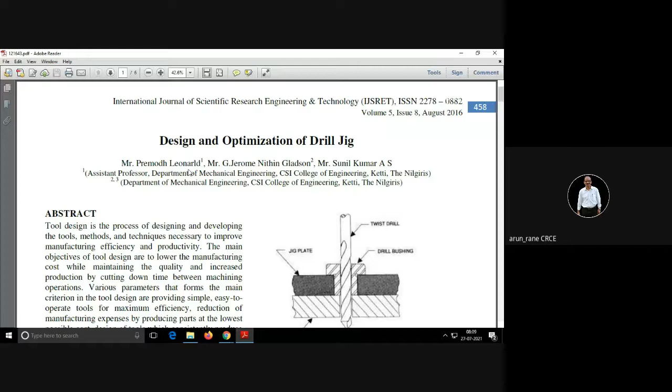So I showed you in one paper how the model looks like. So this is how you have to make it in SolidWorks or NX or Fusion, whichever software you have and whichever software you are familiar with, right? Analysis, if you can, you do it. Otherwise, you forget it. It is not in the syllabus.

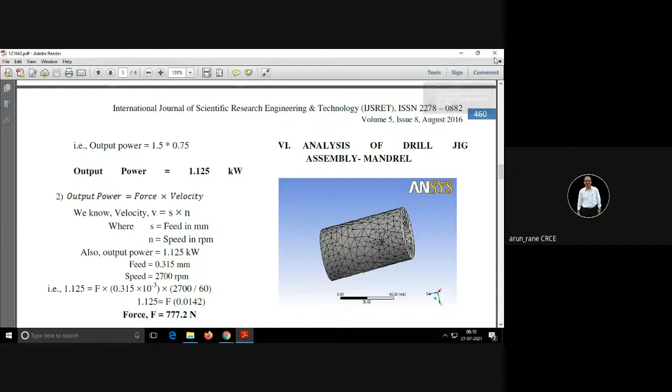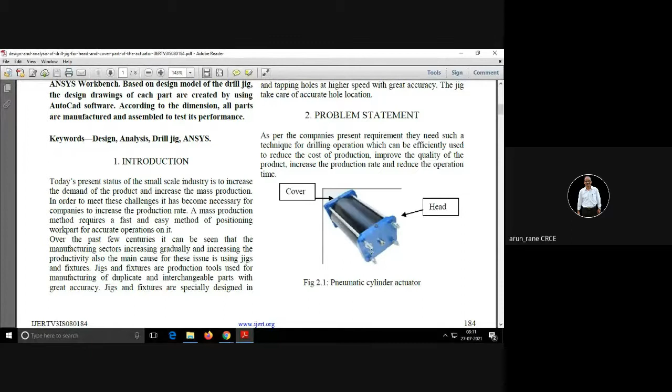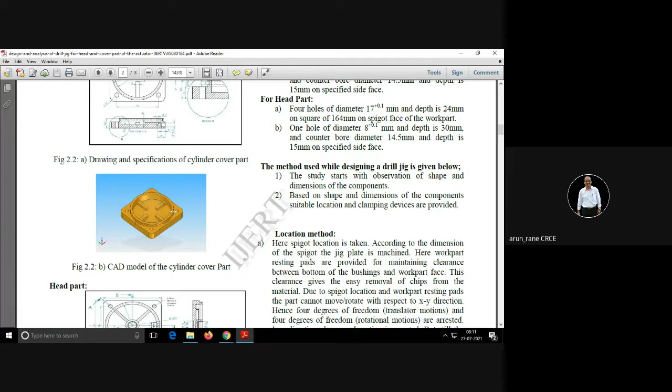So there are two ports, inlet port and outlet port, and it is reciprocating type. These are called tie rods, which fix the two covers. So these are the four holes through which the tie rod will pass, and from one end we are fixing the nut. Here the location was taken. This is called the spigot. This spigot diameter, that is the outside diameter, was taken as a location for designing the jig.

You can see this spigot location. Okay, so you can see the shoulder here and this inside diameter. So your workpiece will rest on this face and on this ID. Your spigot outside diameter will correspond to this ID and will rest on this base. Then you have two strap clamps to hold the component firmly, and your part can rest along these pads. So these are the resting pads, right? And these are just the support pads.

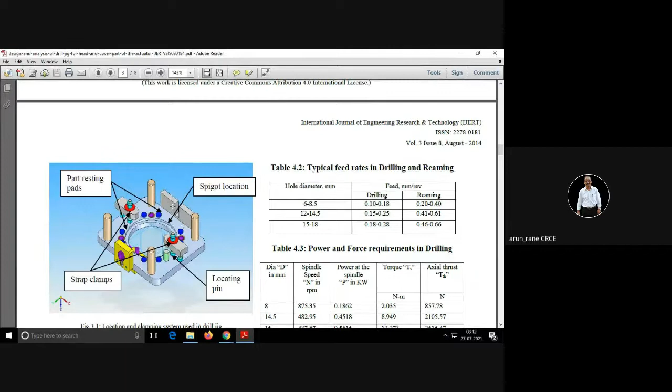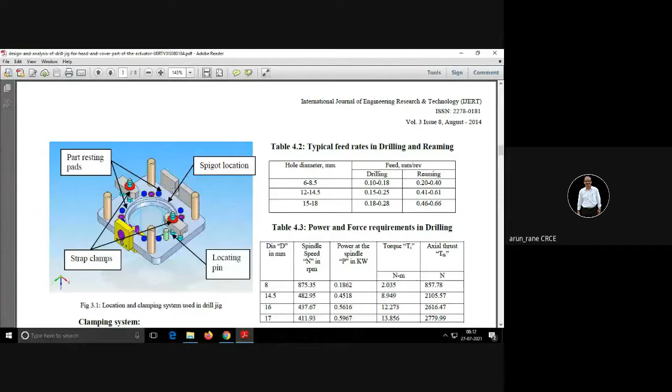Now if you look at the geometry, there are chances that this will rotate, because your location is the spigot outside diameter. So when the operator is clamping in the drill jig, there are chances that it will rotate. So in order to avoid that rotation, you have to butt one square face, either this or this, against these locating pins, so that your holes will come exactly at 45 degrees.

Imagine if you don't orient this part properly, then this hole may or may not come at this angle. It may come here, it may come here, anywhere. So that's why in this component there are two locations. One is this spigot OD and another is this face.

बराबर है? So यहाँ पे what is the qualifying operation? Can anybody tell me in this particular component qualifying operation क्या है? Renan Fernandez, are you understanding? Are you there, Renan? Yes, sir. So can you tell me in this particular component, what will be the qualifying operations?

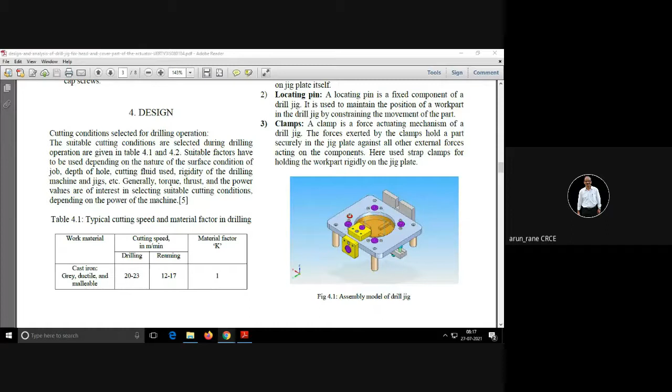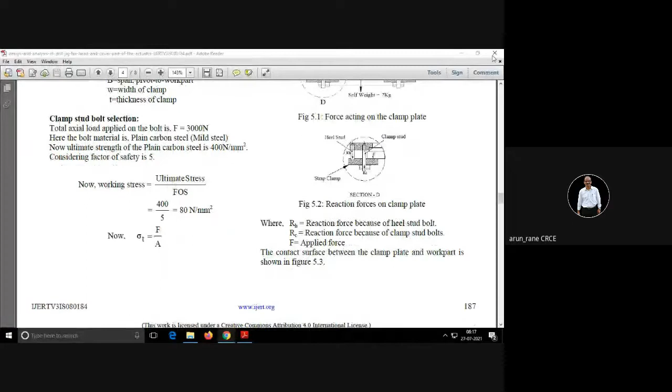So this is a second paper and you can take the reference of this paper also before you start your drill jig design. Let us see in this paper. So you have one design here, you have second design here, plus you have one more design which you have done in third semester. One simple component.

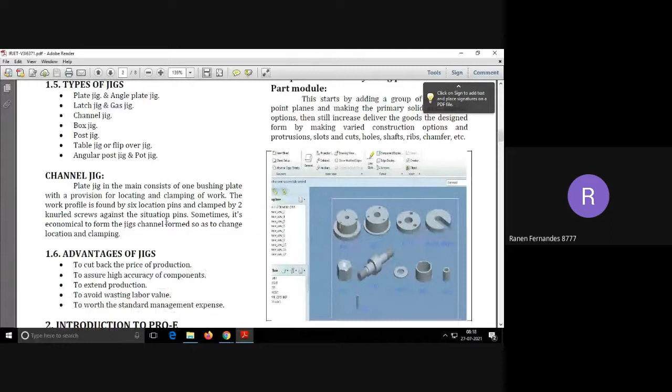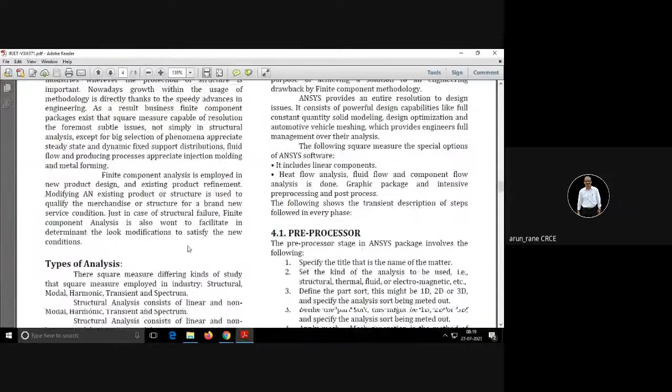The bushes, jig bushes, that is this bush that passes through these holes, और ये bush के अंदर से drill जाता है. Okay, this is the washer for clamping. Now Ranen, can you tell me what for these slots are? There are 3 slots given here. So what is the purpose of these 3 slots? आपने मॉडलिंग में किया था 3 slots, circular slot. So to lock the motion, rotational motion.

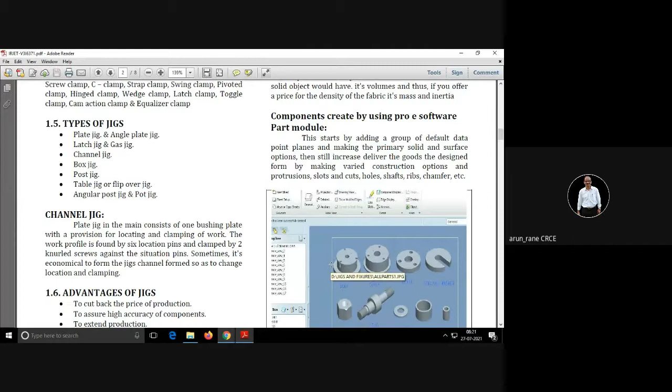रिमूव्ड वेरी इजीली, दैट इज द पर्पस ऑफ दिस स्वार्फ। So this component has been done in third semester.

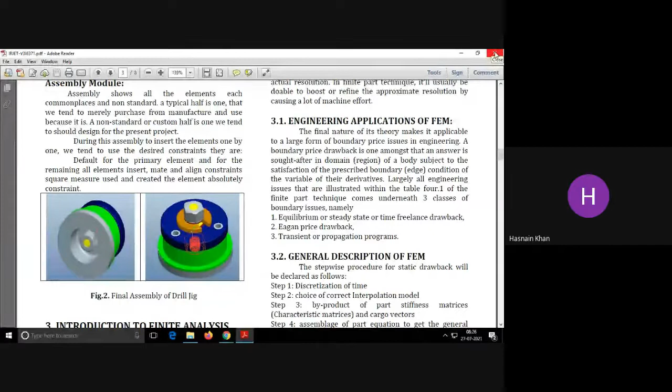Yes, sir. Okay, let's go for construction of the drill jig. Then I will also show you some component like this, SolidWorks file, like what are the different types of jigs. So this is called the angle plate jig. So this is an angle plate.

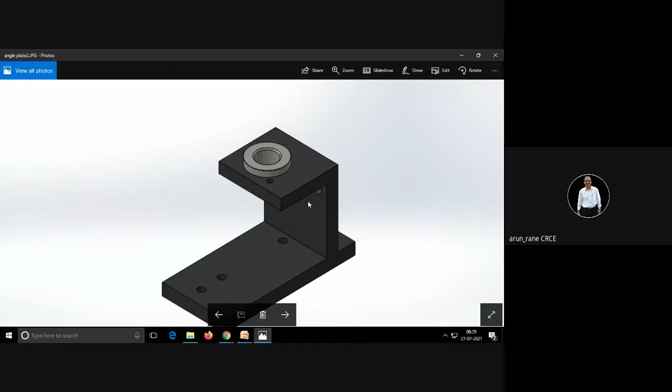Damage. Maybe within 10 or 15 jobs you will have to replace the bush. So that's why you have to go for a hardened bush always. And then here you have to keep a locator which will locate the component. See, now this is a component. Okay, this is one support, this is a pin for locating. And through this the drilling is going to be done.

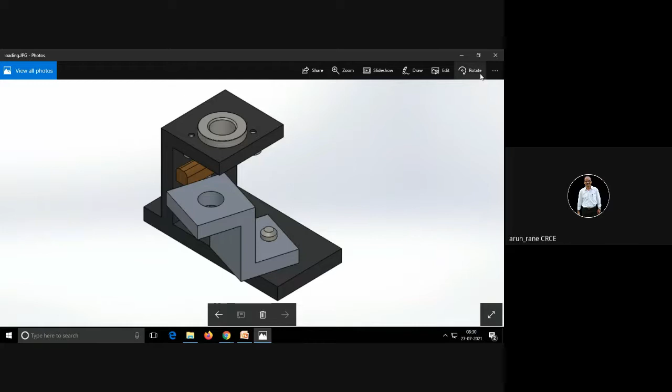At the same time, this works as an orientation also. You can also give the orientation here. आप यहाँ पे भी ऐसा एक पीस डाल सकते हैं, यहाँ पे एक सपोर्ट, so that ये जो फेस है that will butt against this face. So you have to see for the location, you have to see for the orientation.

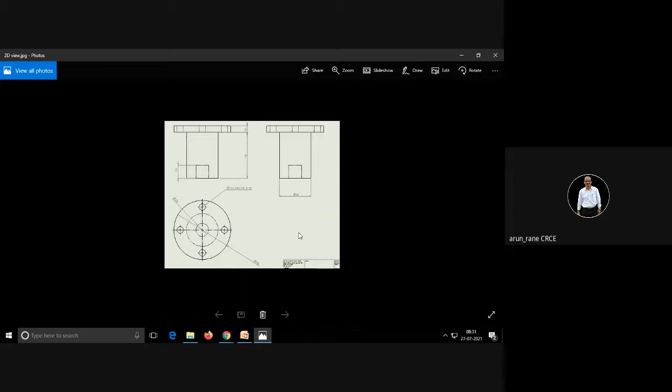These are all SolidWorks files, but since this particular computer doesn't have SolidWorks, the files will not open. This particular jig is called the pot type jig. There are different types of jigs: angle plate jig, box jig, channel jig, turnover jig, tumbler jig. So this was your pot. It looks like a pot.

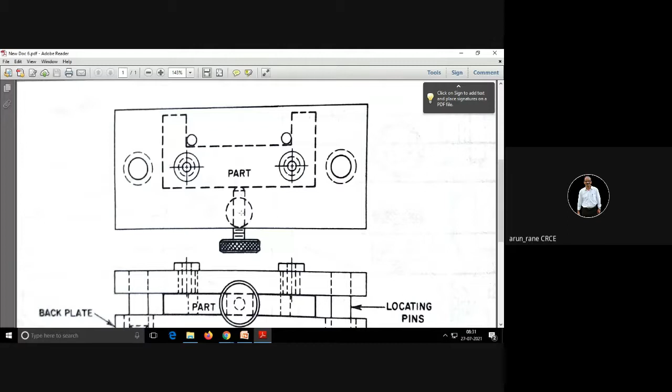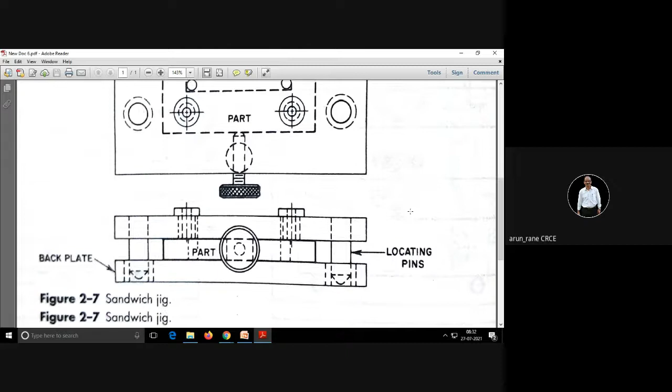So this part is sandwiched between 2 plates. That's why this is called a sandwich jig. We have one bottom plate and another top plate. 2 plates के बीच में the component is fixed, and that's why it is called the sandwich jig. These locating pins are not for the component, but for the assembly of the jig, to assemble these 2 plates. So that was your sandwich jig.

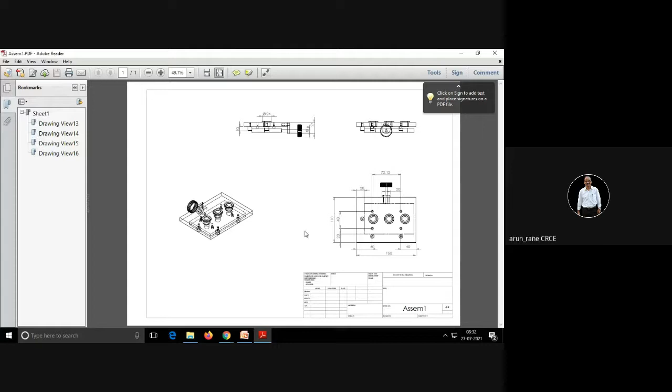Again here, these are the jig bushes for guiding the drills. This is for the template jig. So you are using a template to guide the drill here. Here you are using a template.

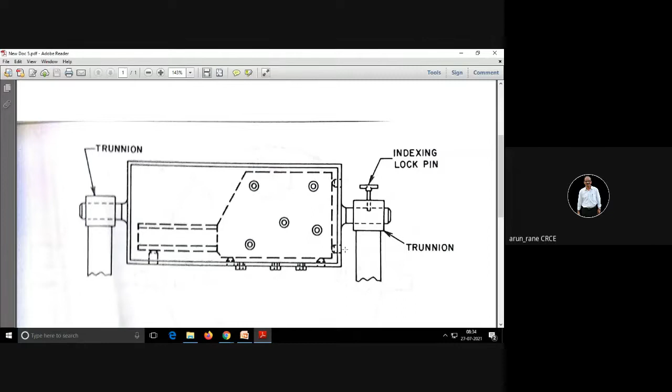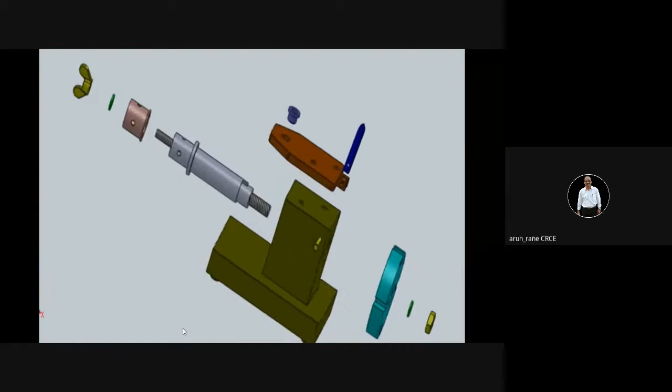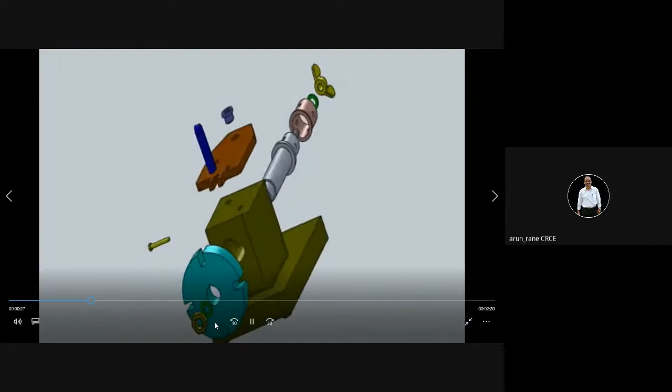This is a turnover jig. Turnover jig is nothing but you have to just turn it, make it upside down, and that's why the name turnover jig. So this is an example of indexing jig assembly. This is called the exploded view. इसको हम लोग exploded view बोलते हैं, जिसमें कि all the components along with their directions are shown. It also gives you an idea how to assemble the jig.

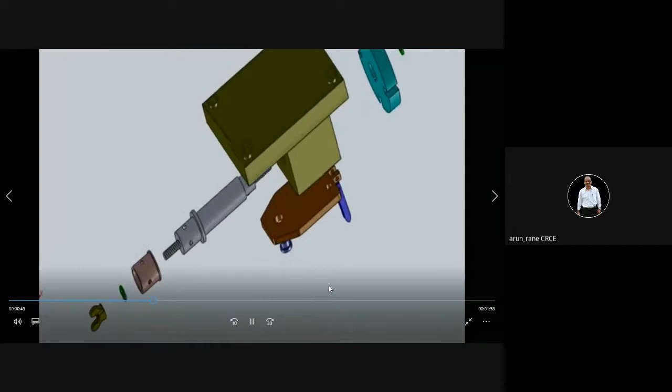Like now these are the pins, guide pin that is to be inserted from here. Then this is your indexing plate जिसको कि राइट साइड से डालना है. देन टॉप से आपको ये टॉप प्लेट लगाना है, and you have to take this base plate as a reference on which you are doing the entire assembly.

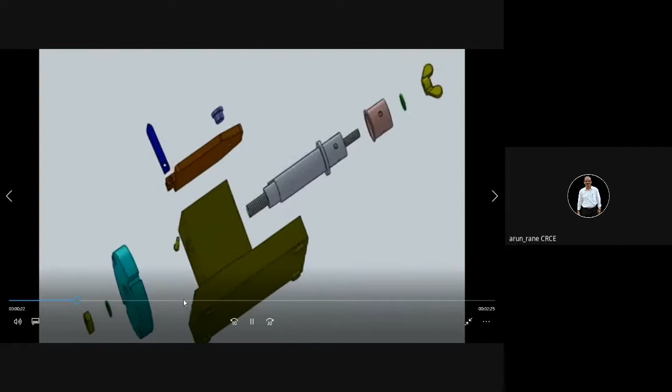This is called the wing nut, and this is our ordinary nut or standard nut. This is the index plate, this is the lock, this is the bush. So if you want 6 holes, then you need to have 6 slots here at 60 degrees. If you want 8 holes, then you need to have 8 slots.

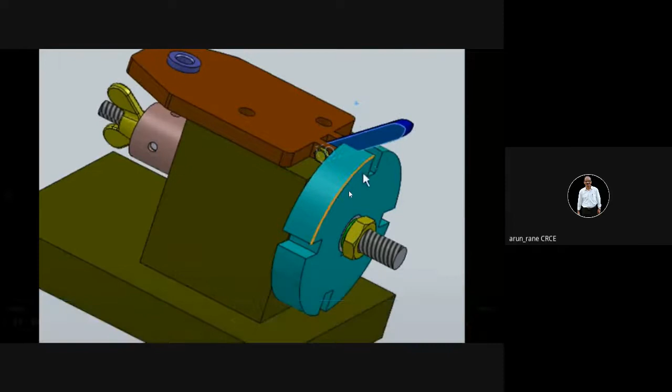In case of milling, an indexing head also can be used. A milling indexing head also can be used. So in case of milling, that is for the dividing head, there are a number of holes, and you have pins, index pins. So you have to just use those number of holes which are drilled on the index plate with the help of an index pin.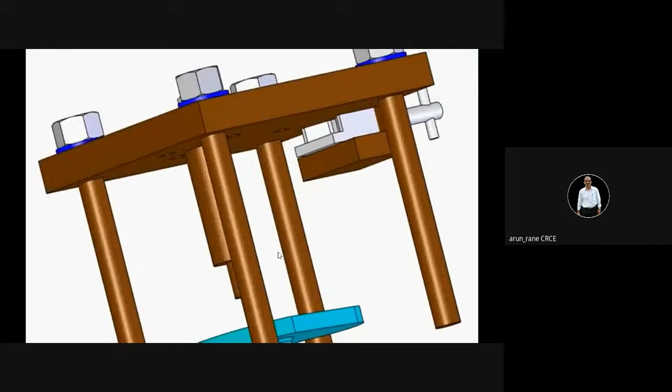Or at the time of drilling, again you have to turn it upside down. So that's why it is called the turnover jig. This is your locator. Okay.

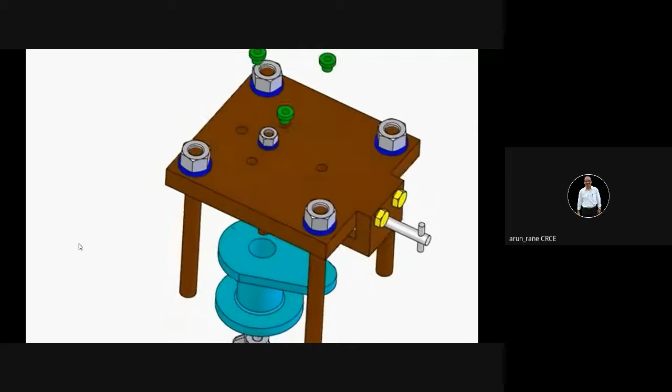Before you do modeling, you have to draw a rough sketch of the assembly with the dimensions. Don't try to directly make a model in NX or SolidWorks. First have a rough sketch with dimensions. This is your jig bush.

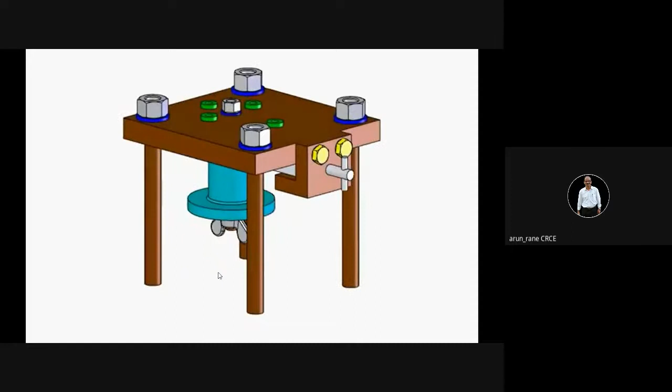Now, all of you must have understood that it's very difficult to place the component from below. Okay, so first you have to turn it upside down so that this particular jig will rest on this face. Now the component can be unloaded and loaded easily. Tighten that component, again turn it upside down. Okay, and drilling can be done. So this is what is called the turnover jig.

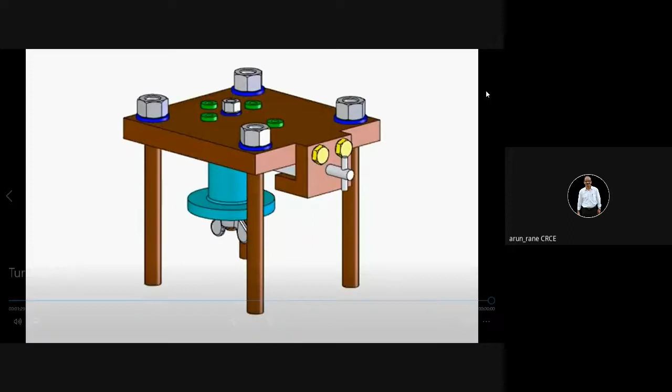So this also can be a good reference for you. So this is the fifth design, the turnover jig. Indexing jig was

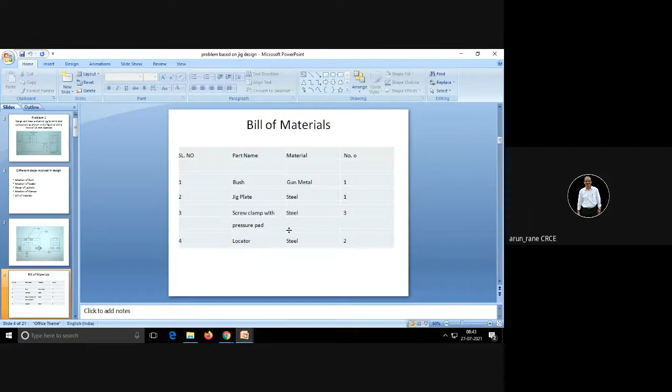Here there are some problems. Design and draw a channel jig. This is another. So you need to prepare the bill of material also. Problem 2. So we'll have to make 3 sheets. One is your drill jig, another is the milling fixture, and next is the progressive die.

So turning fixture, I was just checking yesterday, is not there in the syllabus. So you don't have to do the turning fixture. Only you have to do the drilling jig, the milling fixture and the progressive die.

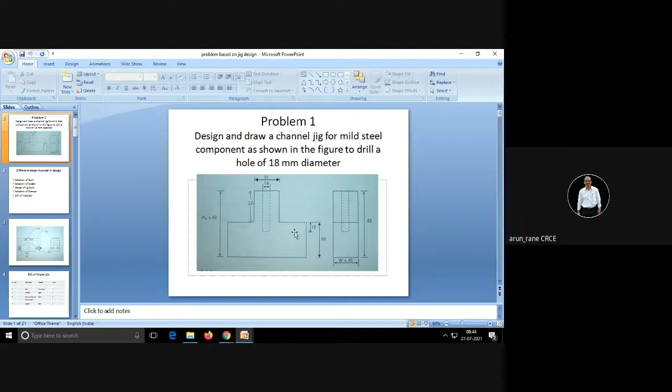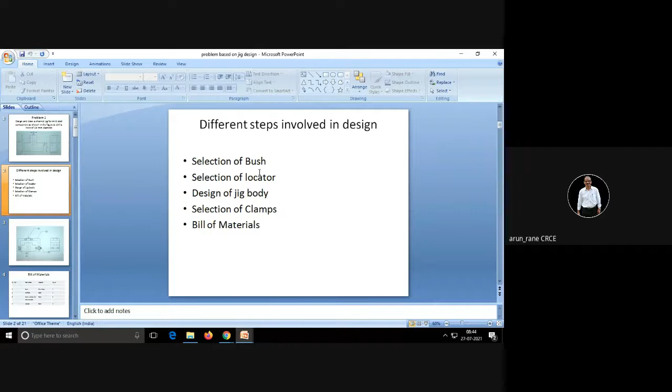The drill size is 18 dia and the depth is approximately 22 and 15, so it will be 37. So what are the different steps? You have to select the locator, references, bush, then you have to design the jig body, clamps, and then the bill of material.

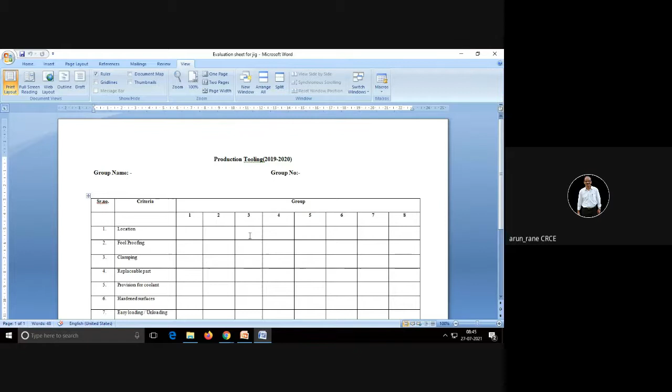This is something called the evaluation sheet for the jig, which also you can use, or a checklist. Generally, for assessment purposes, we prepare this. Like say here group numbers are given, okay, and group number one.

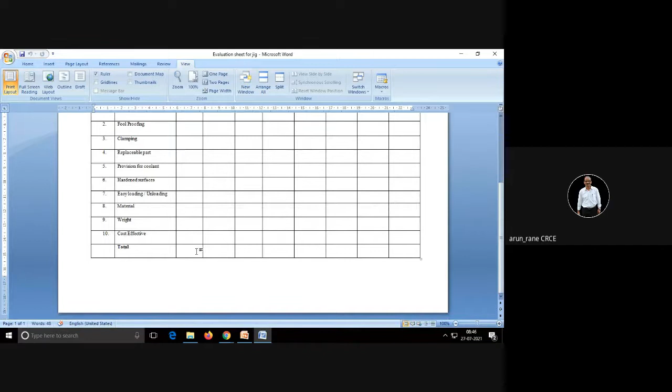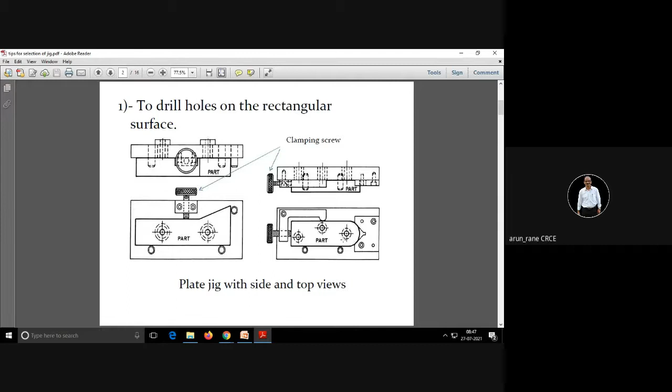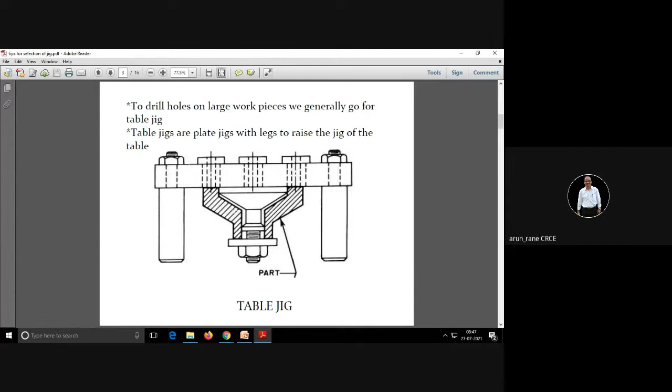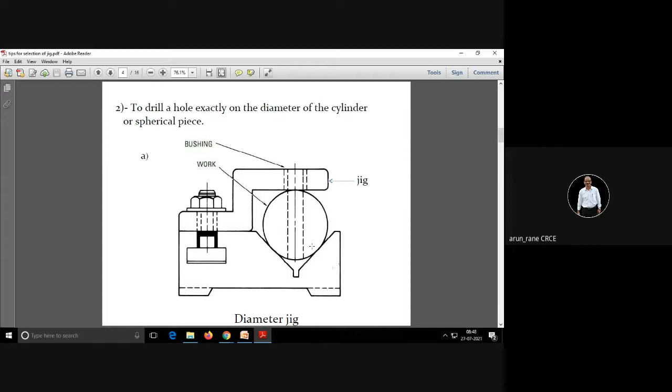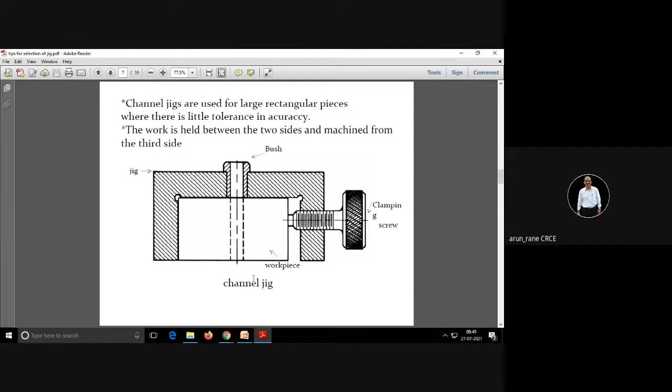So if you consider perpendicular to this screen, there are no locators, or rough locators are provided. So the accuracy is not good in channel jig.

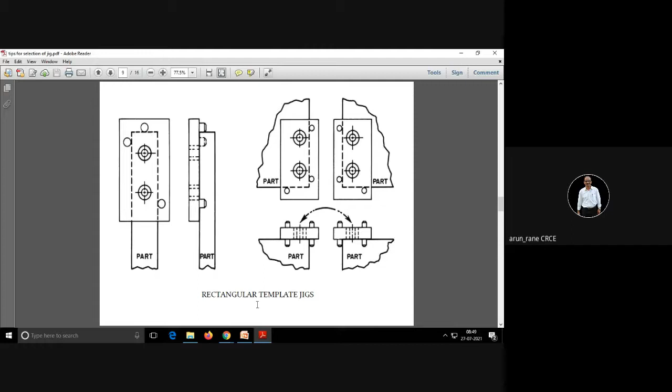Or 4 holes. So these templates are used for drilling the hole. So earlier was circular template jig. This is rectangular template jig. See how the template jig is used.

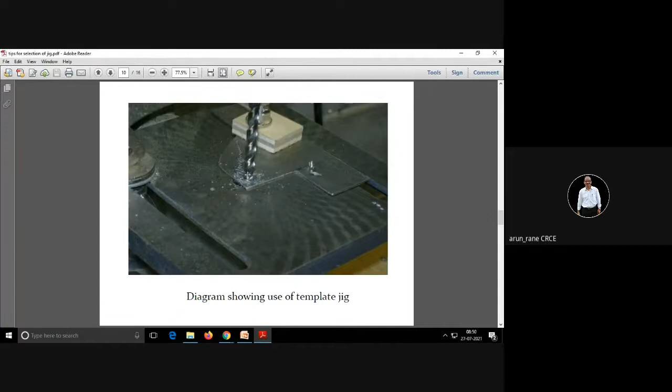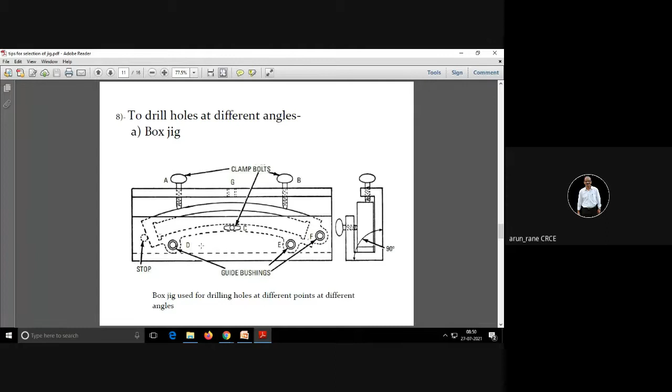This is a box kind of a jig. These are the holes which are required to be done at an angle. एक, दो, तीन. Box means a completely or more or less closed structure.

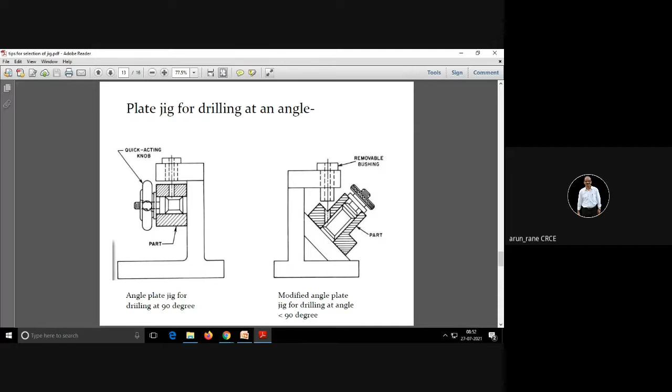See how the bush is made. So instead of having a flat face here, bush में we have a tapered face, so that it can rest properly on the workpiece and will guide the drill.

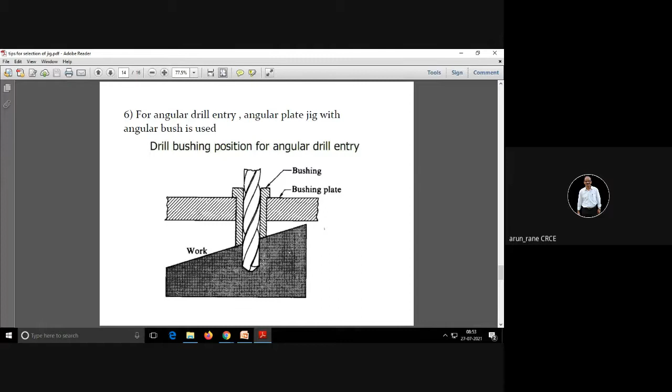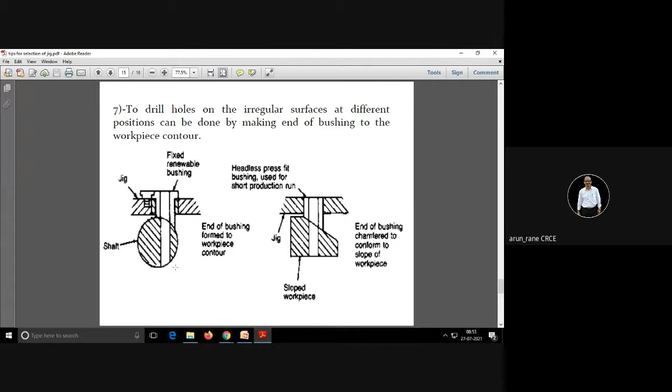Look how the bushes are modified. बुश को कैसा मॉडिफाई किया देखो, as per the shape, so that it will guide the drill properly. Okay, so these were the tips. Problem also I showed you, evaluation sheet also I showed you. Okay, इसके लिए भी काफी दिखाया.

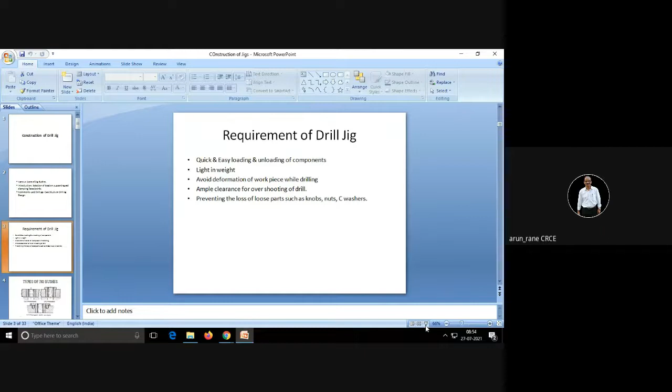So we can proceed with the construction of the drill jig. Okay. So there are many types of jig bushes, many types of drill jigs I have shown you. So first, what is the requirement of the drill jig? That is what you must know, theoretical concept. आपका ड्रिल जिग है वो लाइट होना है, so that it can be handled easily.

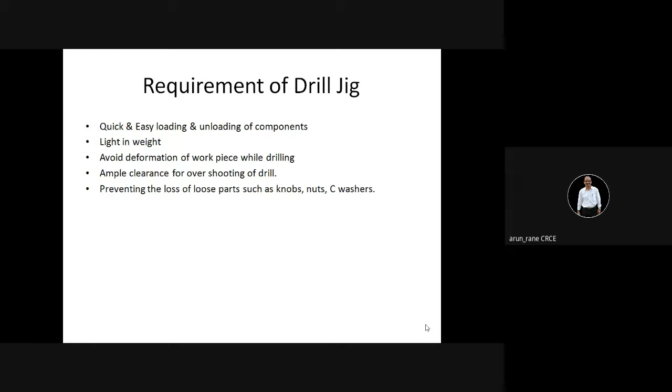Now what are the types of jig bushes? Mostly we use this headed type of jig bushes, headed type of jig bushes always.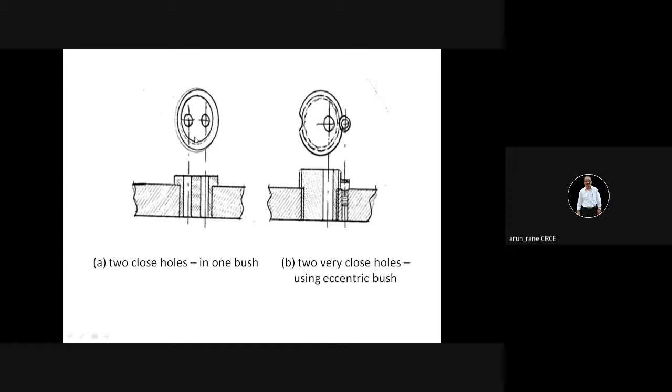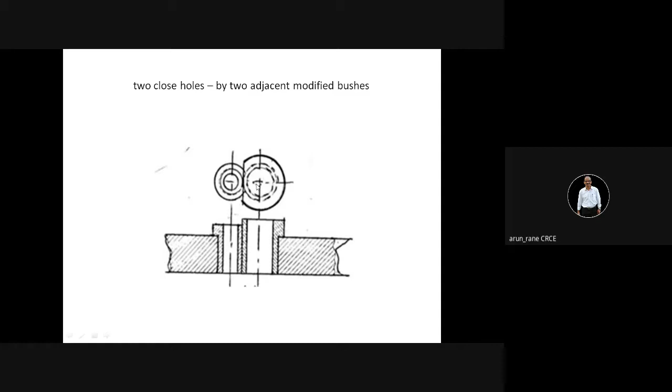Or, if at all you want to use two separate jig bushes, then we go for modified bushes, like making a flat. You have to completely mill it, make it fully flat, so that we can fit two bushes in such a small space.

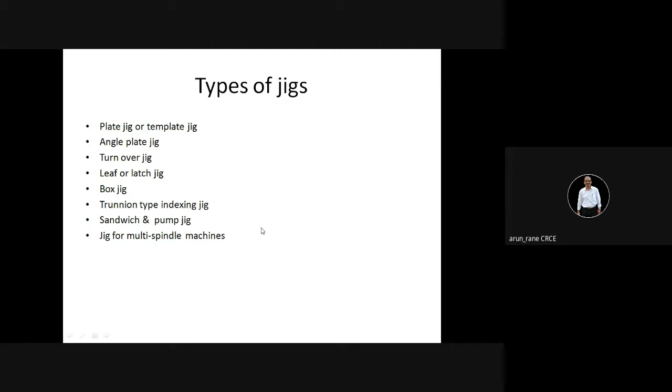So in the next class we'll go for this type of jigs. If you have any doubt, please ask.

I think the CR is changed, isn't it? Any doubt? Yes, sir. Where is Sonia? She's not there, sir. Okay, so Shivam, you are the co-CR or the CR? I'm the co-CR, sir. Why is Sonia not here? She's at her native place, she said. But from the native place also she can respond, no? Why is there no net connection there? I don't know, sir. Okay, you just send your number to me. I don't know whether I have saved your number. I'll text you on WhatsApp. Okay, fine, thank you. You text it right away. Yes, sir. Okay.